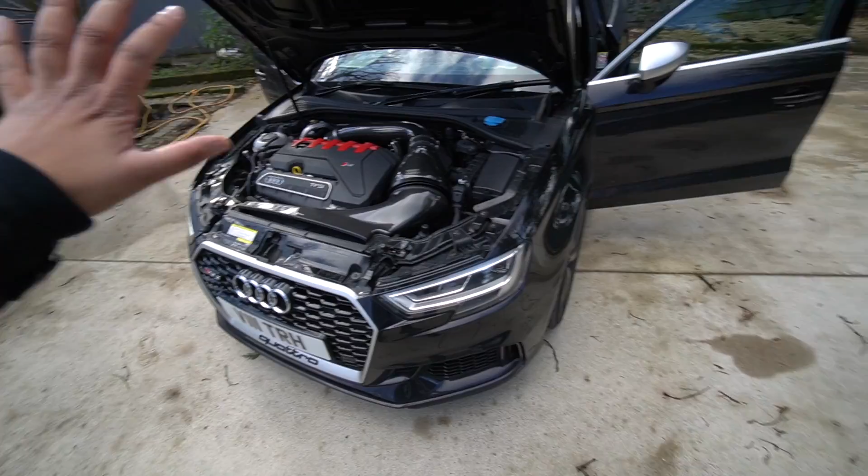Now a quick recap on all the bolt-ons on the car. We've got a bit more overkill, you could say, because I've got a full exhaust system. It's not required for stage 2, but it's a full Milltek turbo-back, the 80mm version. In the last video we installed this Eventuri intake, which is another thing you want to do when going full fat stage 2 - you want to get rid of as many weaknesses as possible, especially this turbo elbow. We also upgraded the spark plugs, so we've got some NGKs in there, and all that's left now is to upgrade the intercooler.

Now I know it's nothing too new on the channel because we did do stage 2, OPF delete, and all that stuff on my old car, but this is a DAZA, so I'm sure it'll respond a bit better. The gearbox is a bit smoother in my opinion. It's just going to be interesting regardless, and it's a bit of extra content.

Now there's been a few other changes as well in the last couple of weeks, mainly the Mark 7 GTI got sold. As you can see, it's looking pretty open here. I still have got the 140i and all of that, they're over there. I got offered a very good price for the GTI, so I thought I'd let it go - there wasn't much more content in it.

The 140i is still here, and the 335i content will be returning soon. It hasn't really changed since the transformation video I did - I've removed the spoiler, that's about it - but I have been collecting a fair few parts. So once the weather's consistently good, we'll get the video started again, because I like doing DIY on this. I don't really want to take it to a garage, that's just boring to me. But yeah, that was a quick little update anyway.

I think we best get cracking with stage 2 on this RS3.

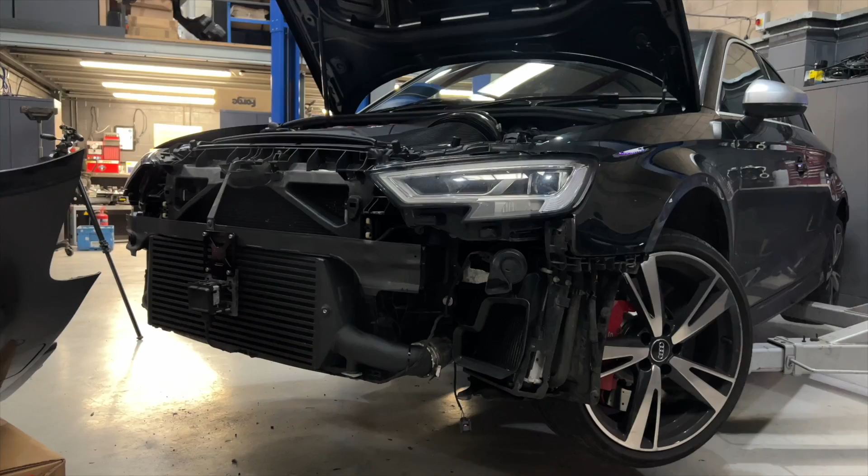Let's hop in the RS3 now and head down to MRC tuning. Right, and just like that, we're back at MRC tuning. Dean's going to take the car in now. Pretty loud.

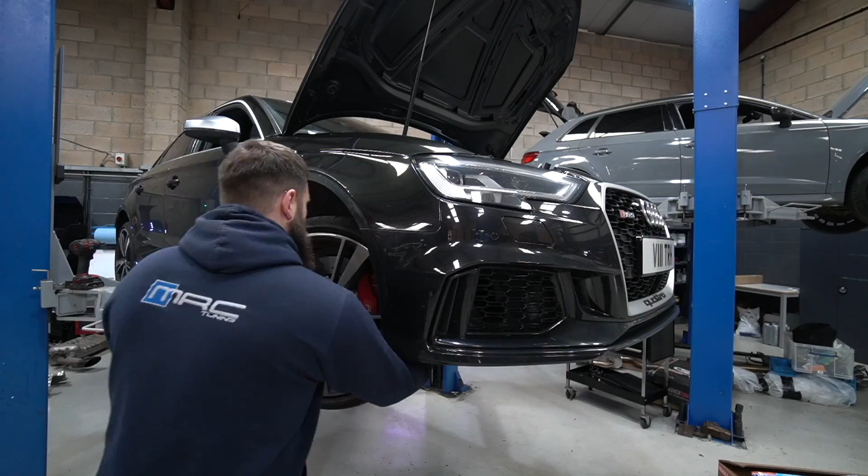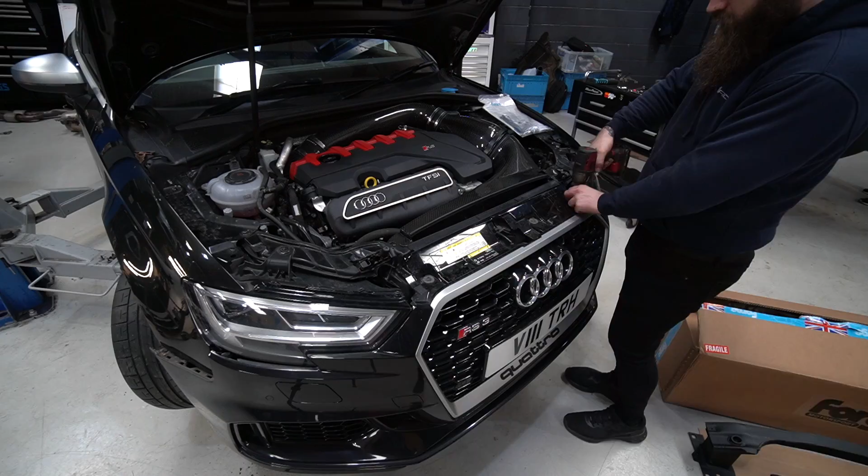So today the plan is we're installing an intercooler, which is pretty much all we need to go full stage 2 at this point. We've gone for the Forge Motorsport one, which also comes with a slightly smaller crash bar, allowing us to get a bit more fitment and also run a slightly larger intercooler.

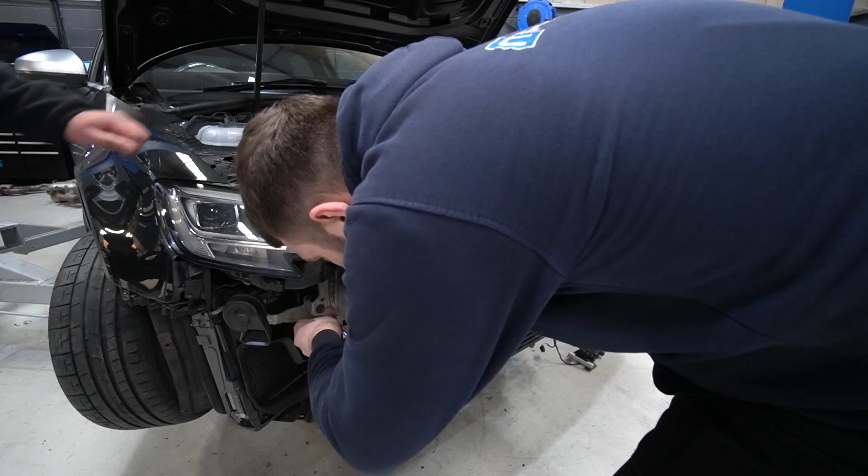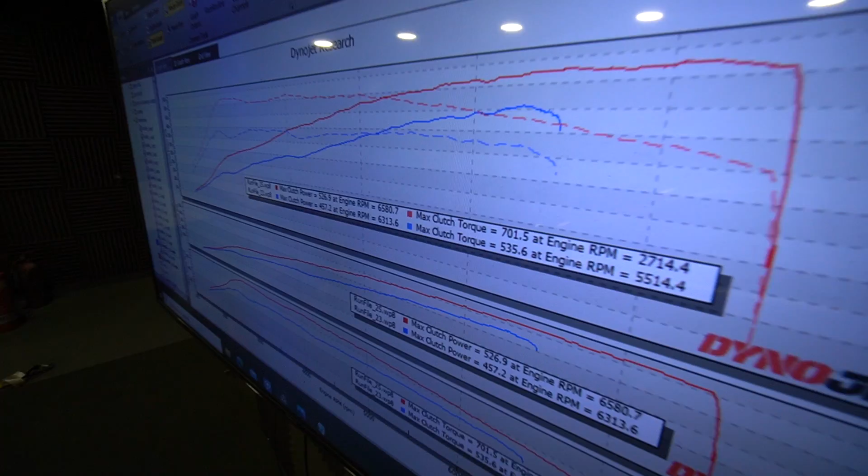Now with these, it is a true front mount, isn't it, rather than the GTI where it's got... Yeah, so it's completely at the front, sits lower down, nice and straightforward - bumper off, original one out, crash bar off, and then just stick those straight on. We also have an ACC bracket, because this particular car has got the ACC sensor, so you've got to hang it off the modified crash bar, I'm assuming. That was one of the key reasons for going for the Forge one, it allows for that. Right, so we're going to make a start on removing the full front end.

That's pretty much all you need to do to install one of these. I say all you need to do - if you've never done it before, it might be a bit intimidating, but I'll do a little time lapse now and catch up with you folks on the other side.

Give you a little comparison of the stock one with the Forge one. As you can see, the Forge is pretty much twice the height there. There's the stock crash bar - it's going to sit pretty much as it is right there. Pretty straightforward, all you're going to do is pretty much a reverse of what you just saw, attaching onto the stock boost pipes there, and then we'll start building up the front end.

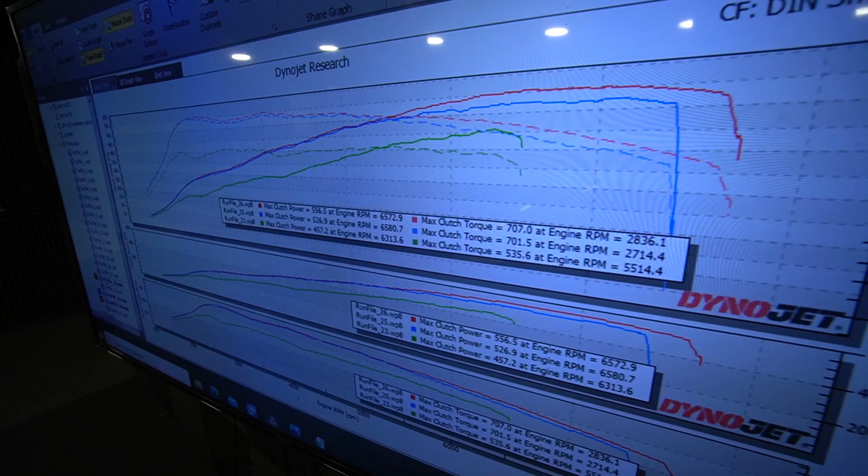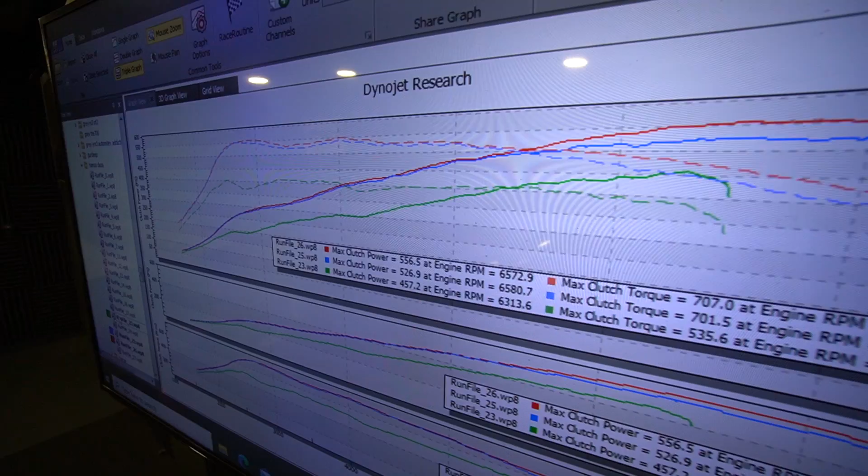Just like that, just like that. That's pretty neat - you don't have to remove the headlights and faff about with aligning it all. See, knowing my luck here, if I did that, the bonnet wouldn't have shut after this. 100% it would not shut.

Are the outlets the same size? They are pretty much, I think they're slightly bigger. This bar gives you just enough clearance. Yeah, it's a very snug fit, that.

Next part is to get the ACC bracket installed. You get that bracket? Yep, so this is separate - you have to make sure you get this when you're ordering a Forge cooler. Sensor bolts onto there, and then it just needs a little bit of wiring tidied up. Yeah, attach it straight to the crash bar right there, and that should keep it in line with where it was before.

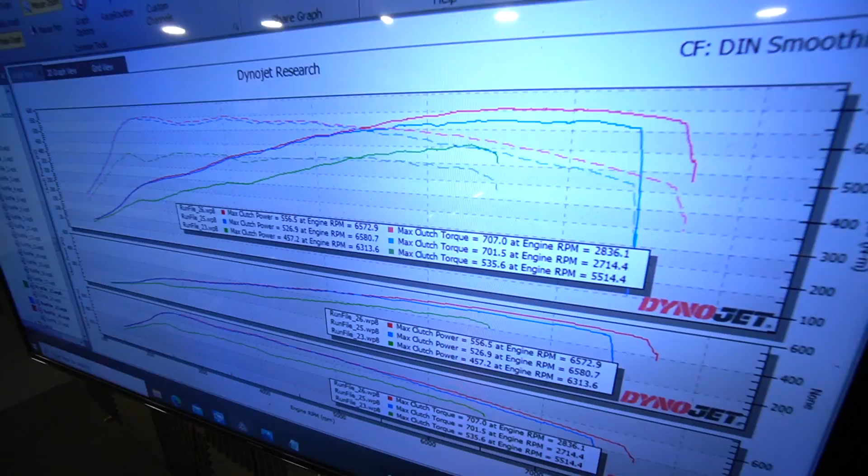Okay, so now that the intercooler is done, what's the next stage? We need to remove some of these. Yeah, so all of this - all of the foam here, these two foams, this bottom one, this plastic trim behind that's held on with all these bolts - that all comes off complete. It does make the grill a little bit weaker when it's all gone. Right, and you can cut it and keep this part. But with most of our customers, they want to keep everything so it can go back to stock if need be. So taking all that out doesn't cause too many issues, and it gives you all the clearance you need for the cooler.

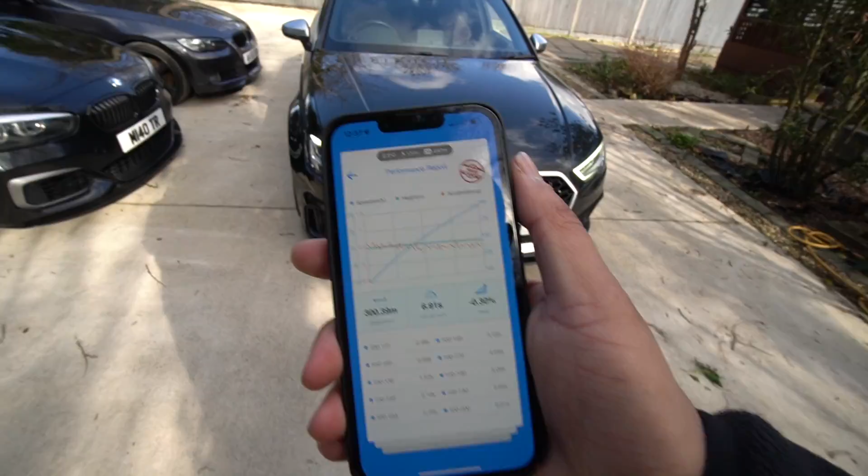Right, that's coming off now - so that's that section off. Yeah, it's a pretty substantial piece, I thought it was just the middle bit here, but it backs onto the grill as well. So if you look at it from the front now, it's a lot more opened up. Definitely prefer it this way.